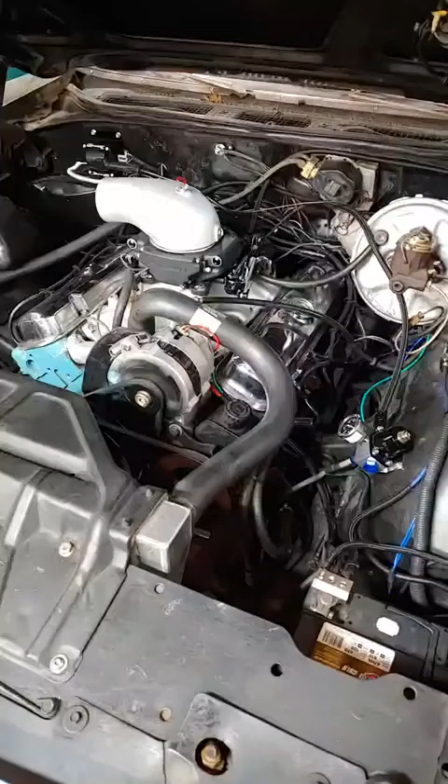Well, the ice over the ECU cut down the restart time to 10 minutes or so. It's been running now for 2 or 3 minutes. Pressure's at 60, just fine. Idle's great.

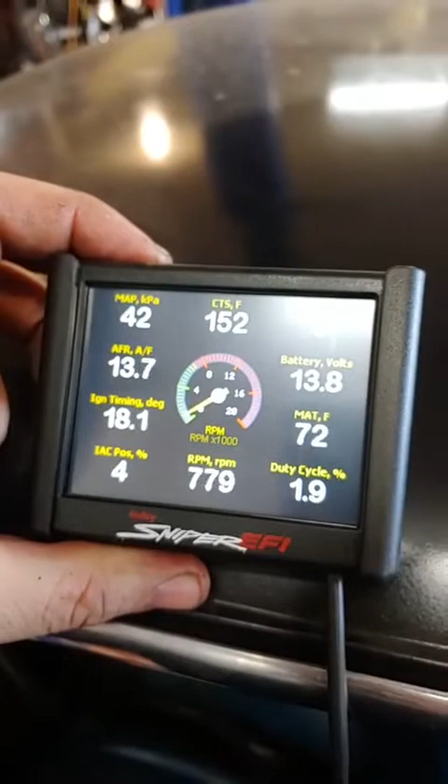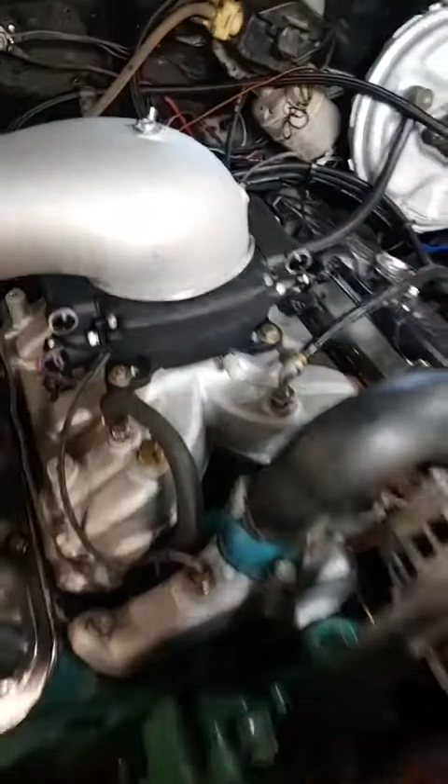Hook the laptop up while I'm recording it running. Cover's still cool from the ice. Anything to stand it up - got nothing to hold it up for.

See if I can do this one-handed.

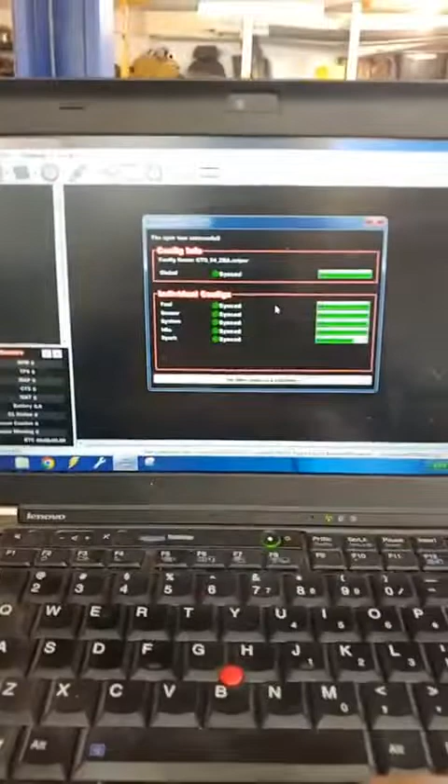Hey Lee, it seems to be a nice kit. Definitely get a nice fuel pump system. I bought a big one because I plan on going turbo, but it looks like the Holley one's pretty good, the one they sent.

So it must be warmed up, it's learning. Can see here, it's well above 160, so it's tuning. The closed loop itself, I got at 0. I'm sure the learn is a couple percentage, but the idle's tuned real good since the idle's good.

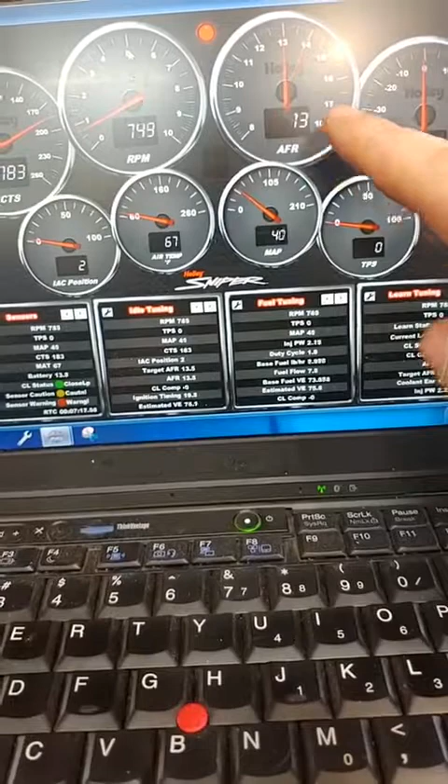It's starting to do it, and it's just playing with the idle a little bit. This air-fuel ratio shouldn't be rounding up - it's rounding too many decimal points and just flickers between 13 and 14. I need to change that, but...

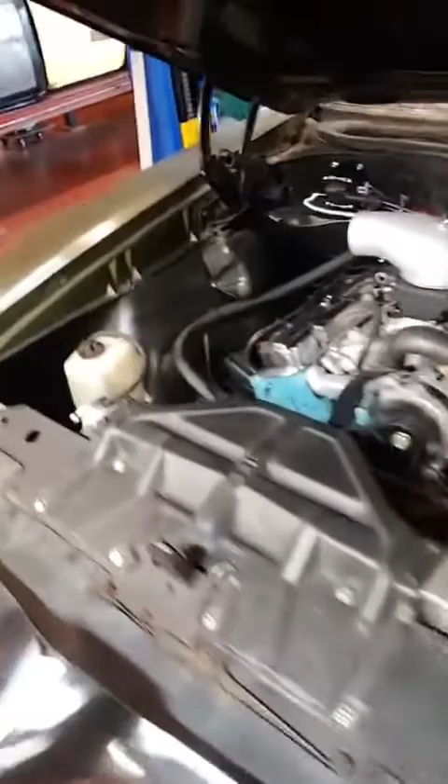Yeah, I got the no-load tuned pretty good. Lee, in the garage here I got it tuned good because I get 10 minutes at a time, and I can data log that whole time, so it learns pretty well. I adapt, kick over the learn table to the map, and then smooth everything out by hand.

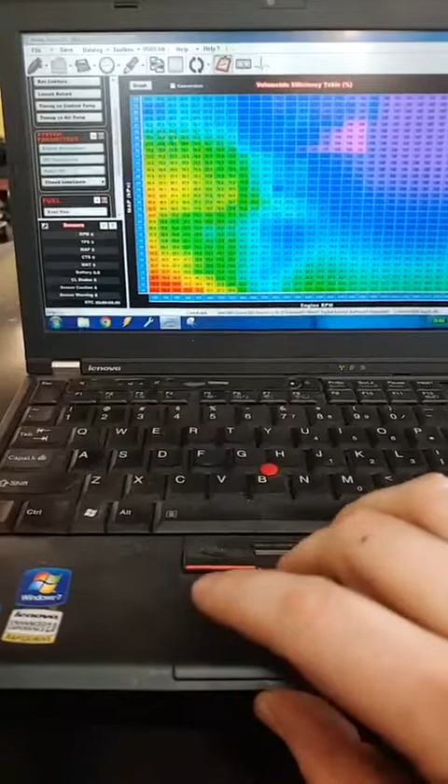You got a learn table - all this green here is how the computer is adjusting it. That's the self-learning, if you want to call it that, but it's just long-term trims, kind of like HP Tuners and GM stuff.

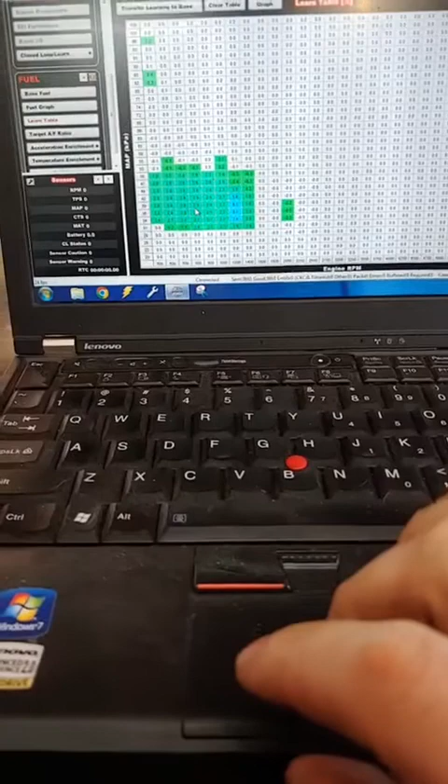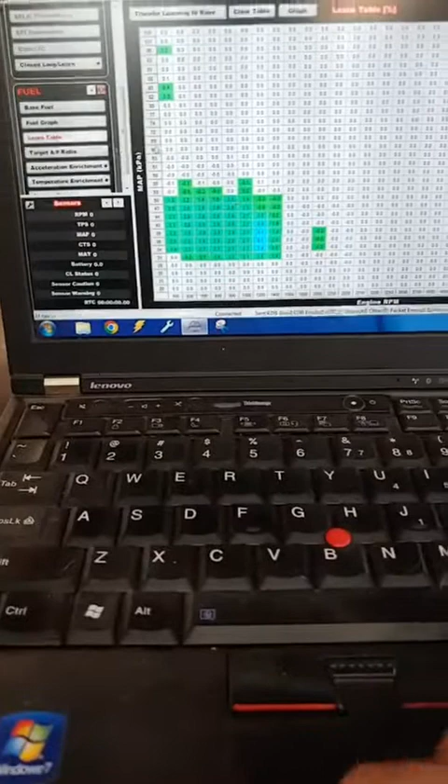I got these down, if you can see, they're less than 3. The change in Ohio weather adjusts that more than that. And then the base fuel table I have pretty well smoothed out. I could smooth it more, but I want to drive it around a little bit more.

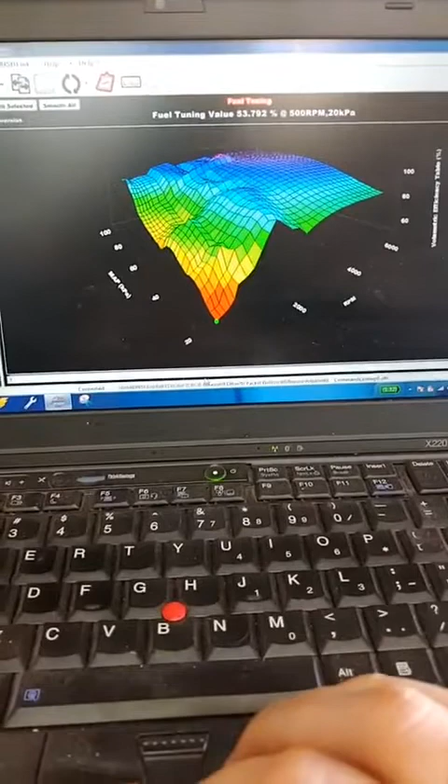I'm not real sure whether I should lower that or raise it, but I'll leave it there until I can drive around some more comfortably.

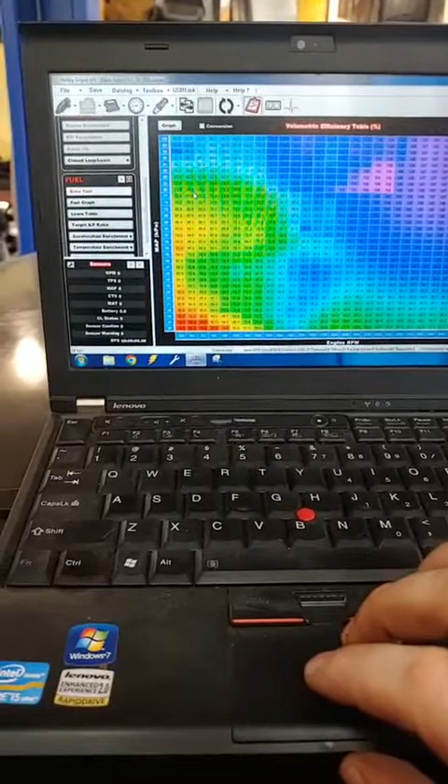Lee, what do you want to bring on camera?

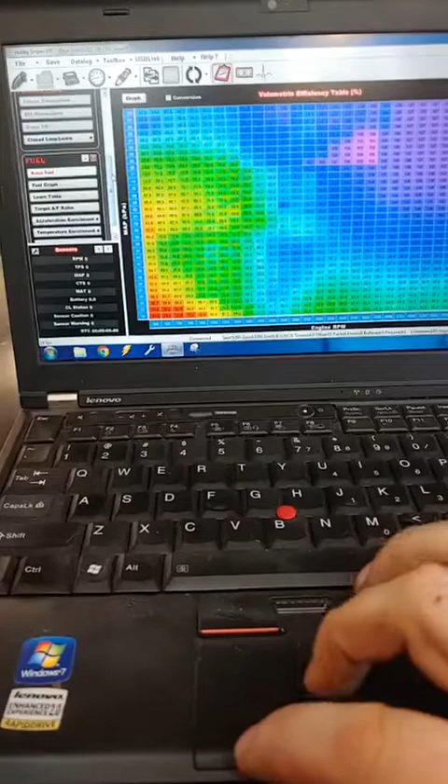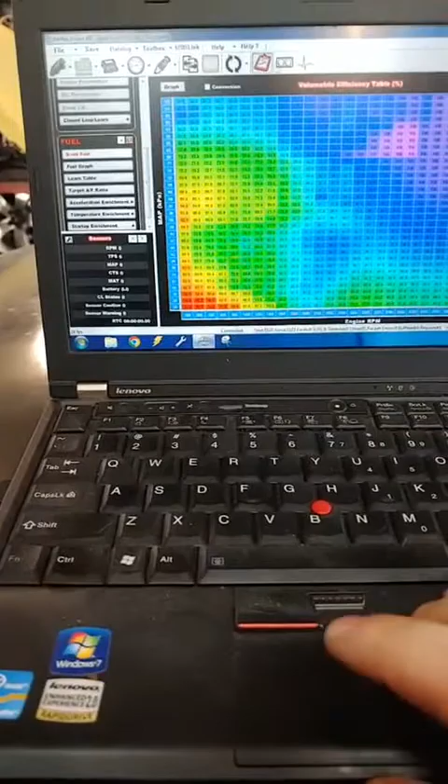Cooling works good - you see it was up to 180. Cooling fan took it down to 172. I turned that down a little bit, hoping the fan will blow on the ECU a bit and cool it down faster.

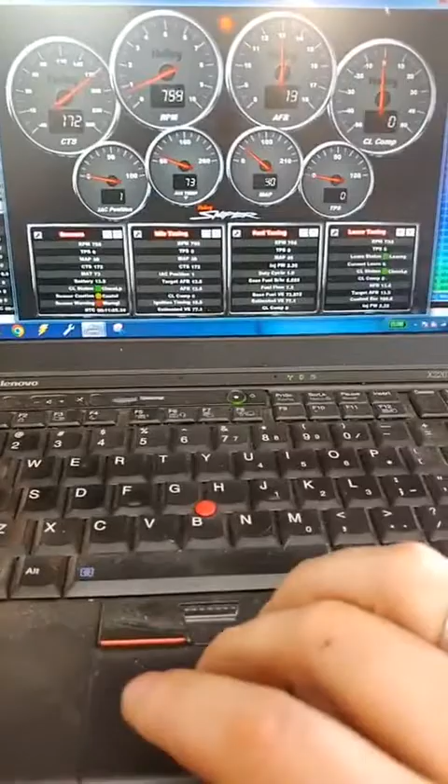I don't know if I turned on data logging on here. Should be. Yeah.

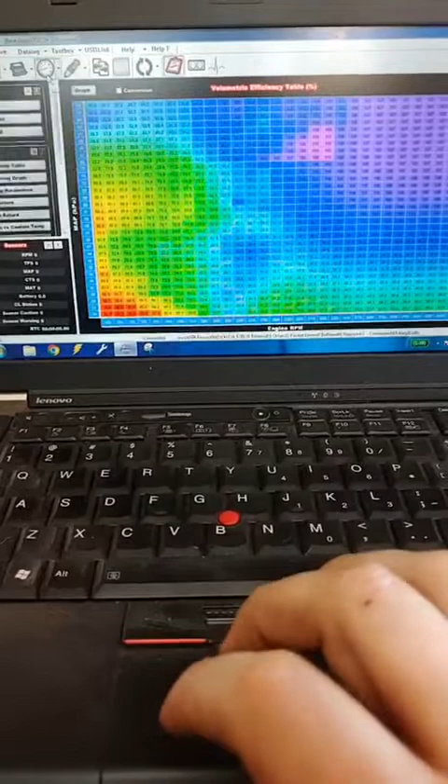Sorry, I can't get it to focus on those values, but that's all the factory settings. I just got a safe timing setup in there.

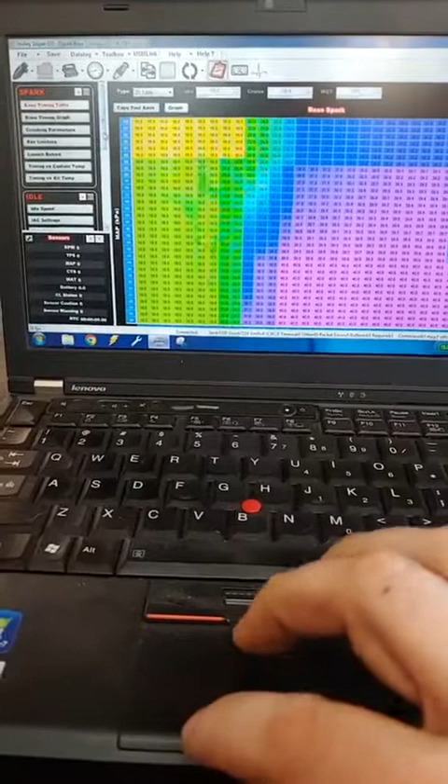Fuel pump still right at 60 psi. That's a little warm, but not that bad.

I did move the PCV valve from this port to the intake to try and see if any heat is coming from this going into there.

I don't want to rev it too much - this thing's kind of loud.

What'd you want, Josh? What'd you want brought on camera?

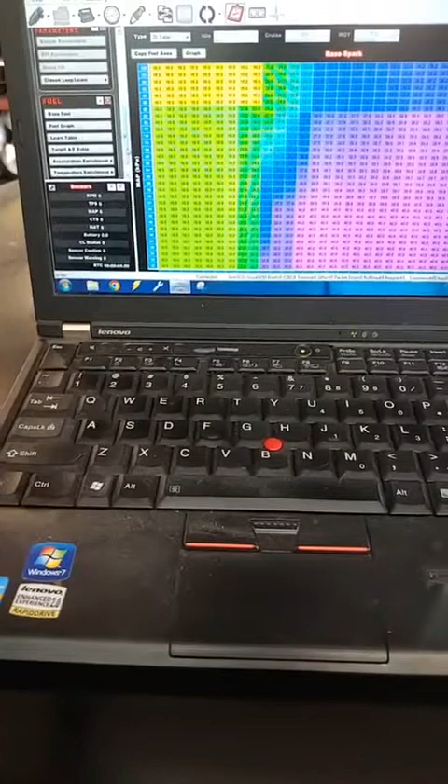Hi, Bill. Trying to catch a live video of this thing just failing on me.

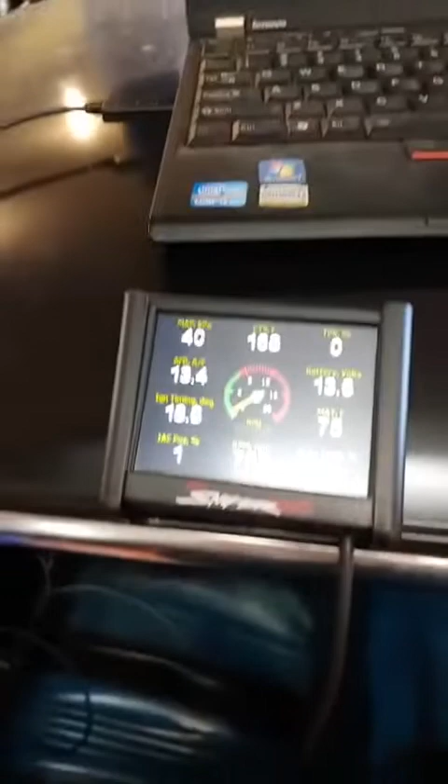I'm sure everybody's having like Easter dinner right now. Saturday before.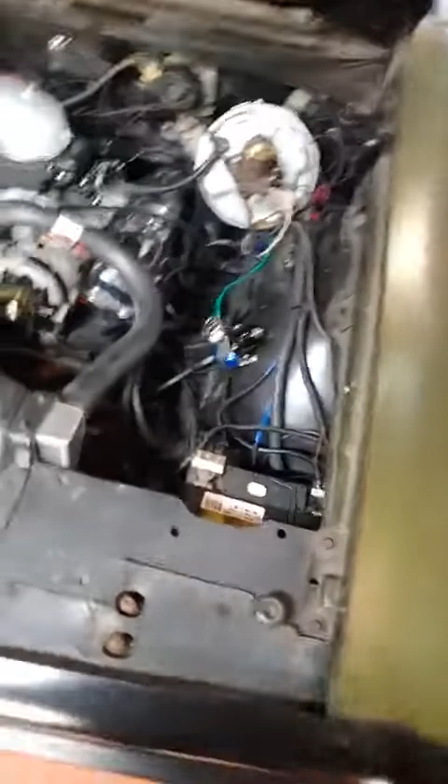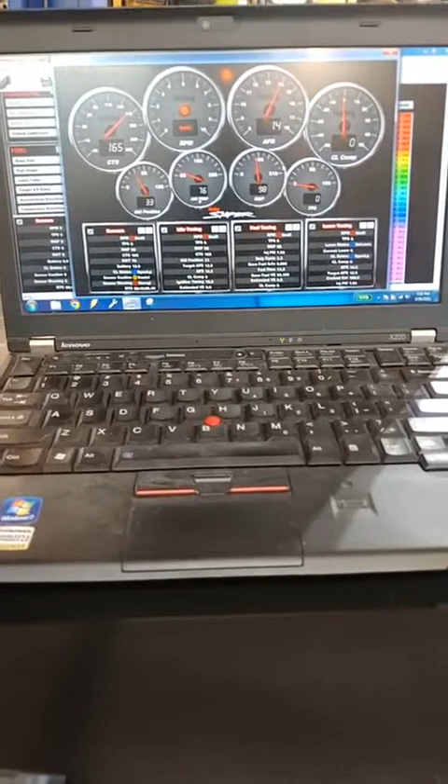There it is, it just dies. It just happened to be when I revved it that time, but that's what it does - it's just done. I don't know, it's warm, but it's not hot. Screen's still showing everything, and it cooled down all the way to 165, so it didn't overheat or nothing.

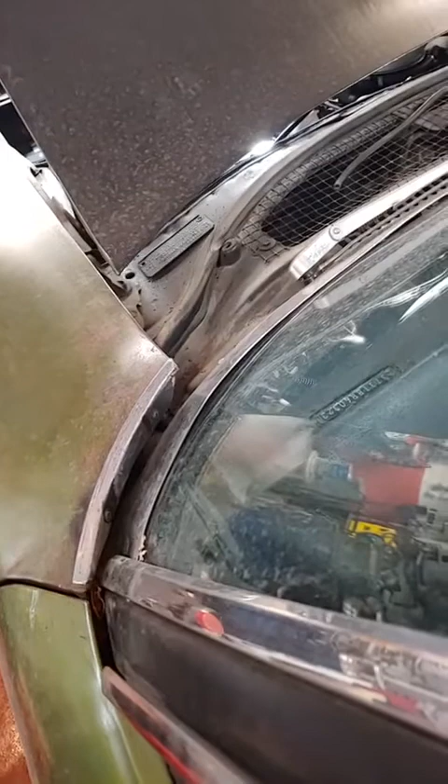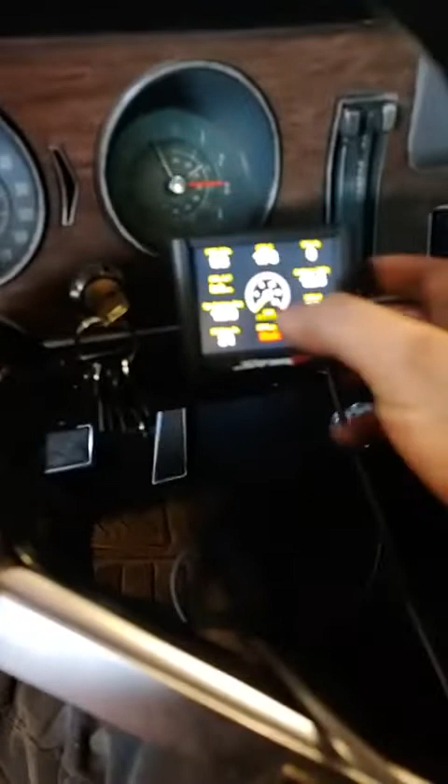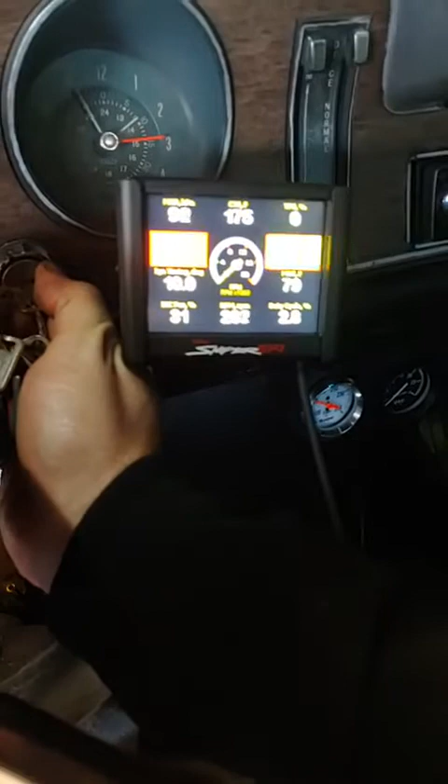Also HyperSpark and also, so it does. Yep, once it, as you've seen, after it runs, perfect and idle starts up fine for about, it looks like it took 8 minutes.

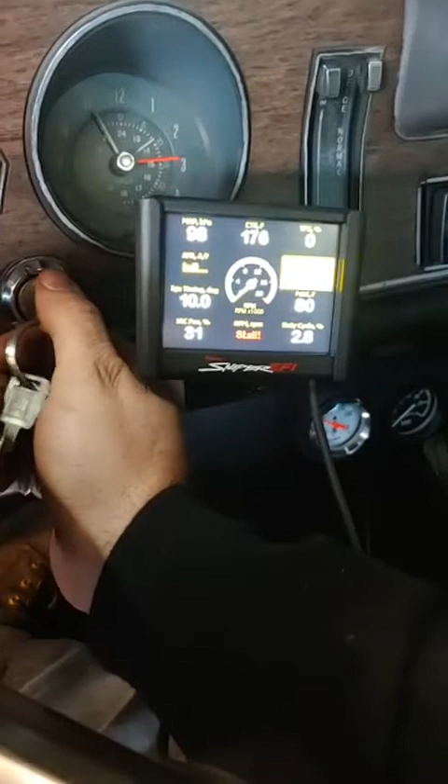Now it barely hits. And also a great example of progressive values and social commentary done right.

I guess that was about 4 minutes.

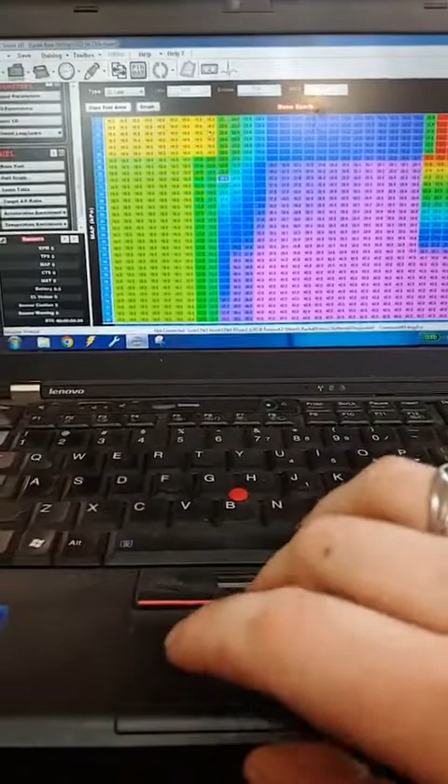If I want to open that data log, and that was the previous one. Here's the newest one.

And then you can kind of see it's just idling for the entire time I was recording and live here. I was live when I hooked up the laptop and all. Let me turn off this damn YouTube.

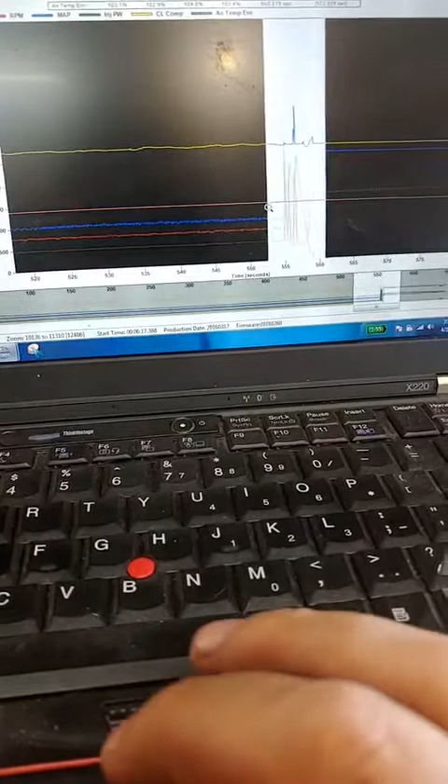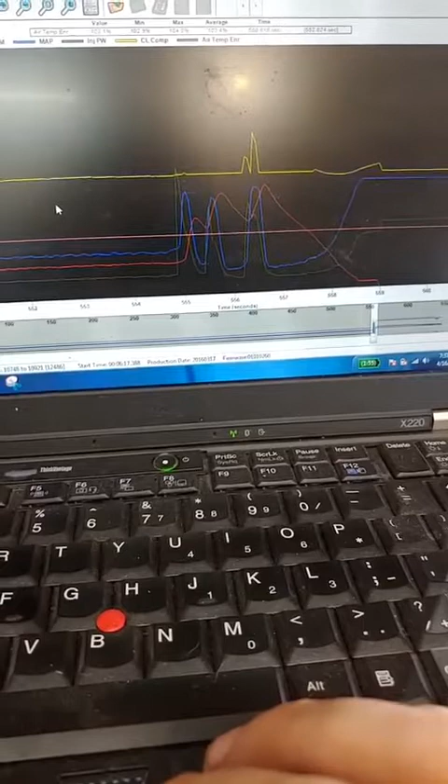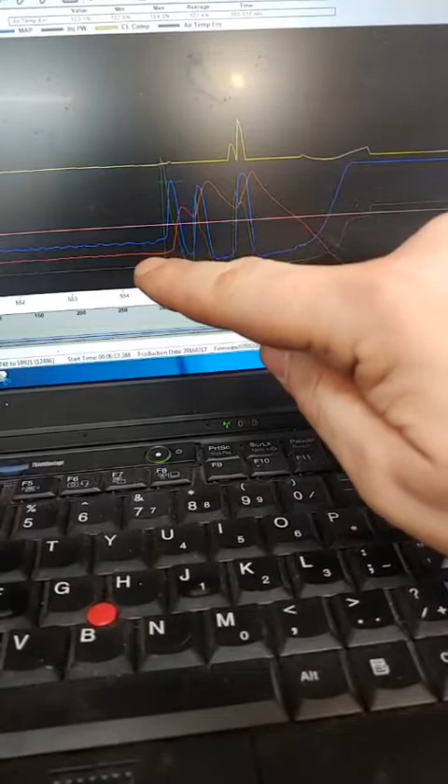So the red here, I'll talk about on and off, is the RPM. So see, it's in there idling. That's when I cracked the throttle, you see it rev up. It only went up to 2,500 RPM. And then it just died. As you can see, everything just plummets off.

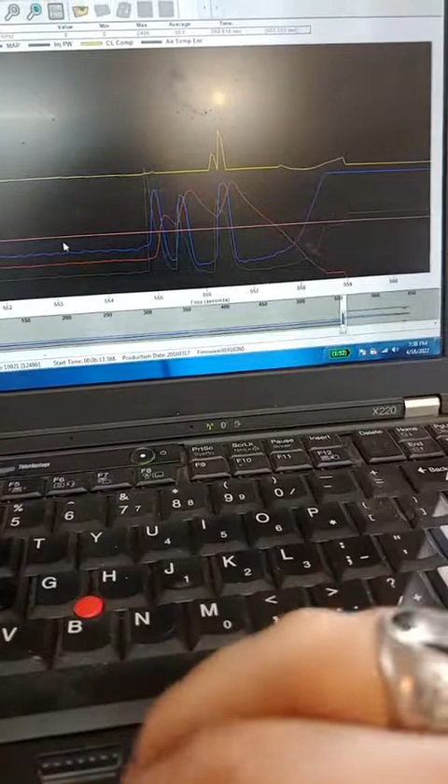This one's not as good of an example because I was playing with the throttle when it died. Let's see if I open the previous one where I was just letting it idle until it died. Let's see, it's the same as the last one. It just sits there idling for, I think I had this one another 2 or 3 minutes before it died. I can almost predict when.

Zoom in on here. Now the red line is RPM, blue line is MAP sensor, engine vacuum. RPM red, engine vacuum, what's green? Air temp, I don't even need that on there, nobody cares about air temp.

But it's another signal, so I usually have it on there because it's another signal wire. If that gets interrupted with RF noise, that could cause issues, but it doesn't seem to be it. Coolant temperature sensor is the same, just sits there flatline, but that's also a sensor that could jack with it, but it seems to be clear signal.

I'll scroll over here to where it just dies. Now this one, it just sat there and idled and did the same thing. It's done this about 5 times, I just only data logged 2 of them so far.

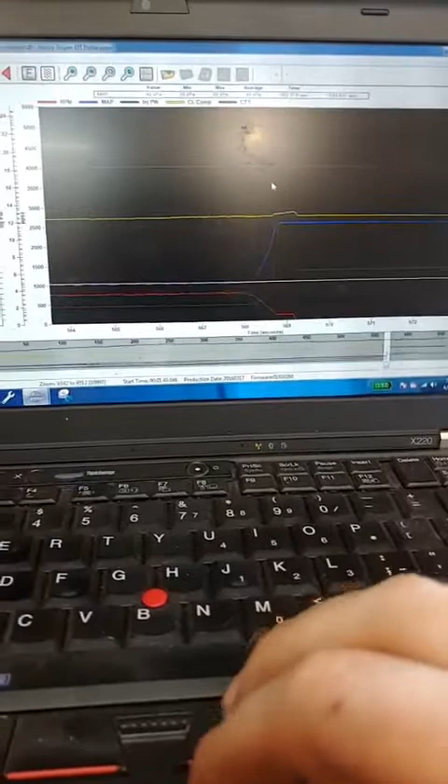So the blue is the engine vacuum, going less and less as the RPMs went down and down, because it just cut off fuel. Temperature good, there's no noise. If there's RF noise like I had before, these just go bang, like it looks like an earthquake chart.

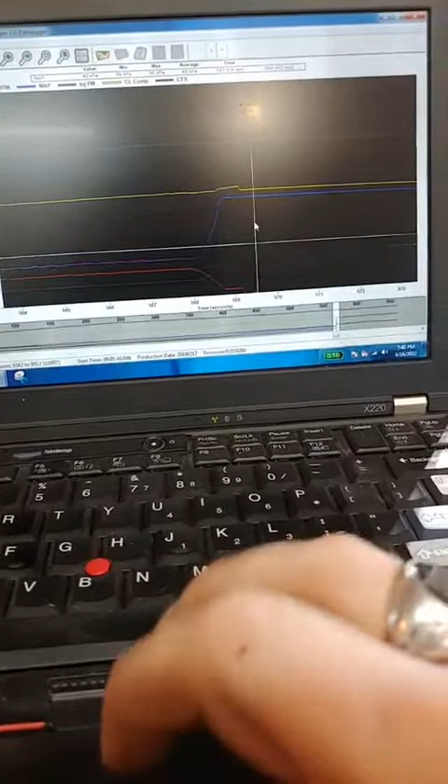But doesn't show much at that rate. That's what I'm dealing with. I don't know if...

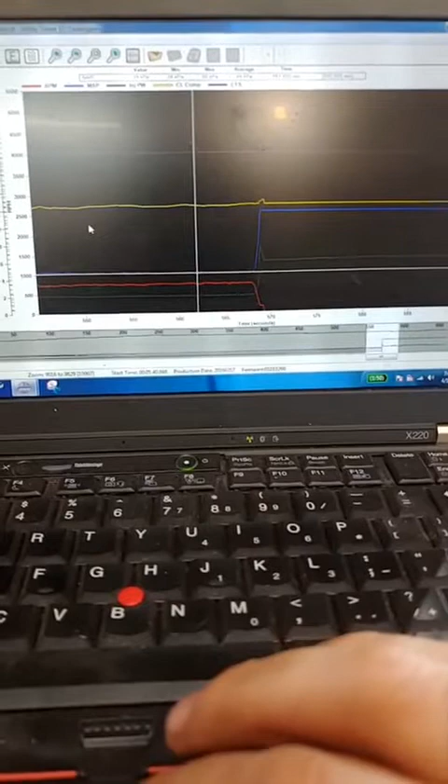Well, this video did what I wanted it to do. Just have a live video at the same time as the data log.